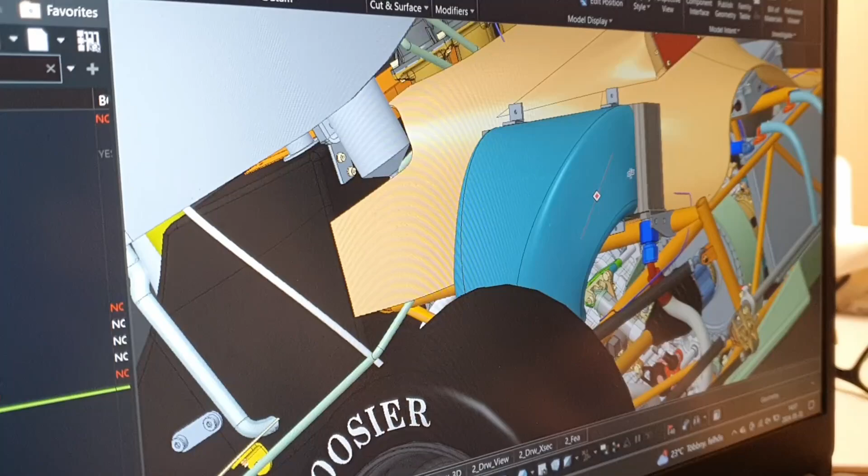So the part we are printing is an air intake vent for a race car being developed by a group of students at the Technical University of Budapest, my alma mater. The 3D printed piece itself is not going to be used directly, but will serve as a mold for carbon fiber lamination. Given the specific strength requirements, they have provided the material for printing.

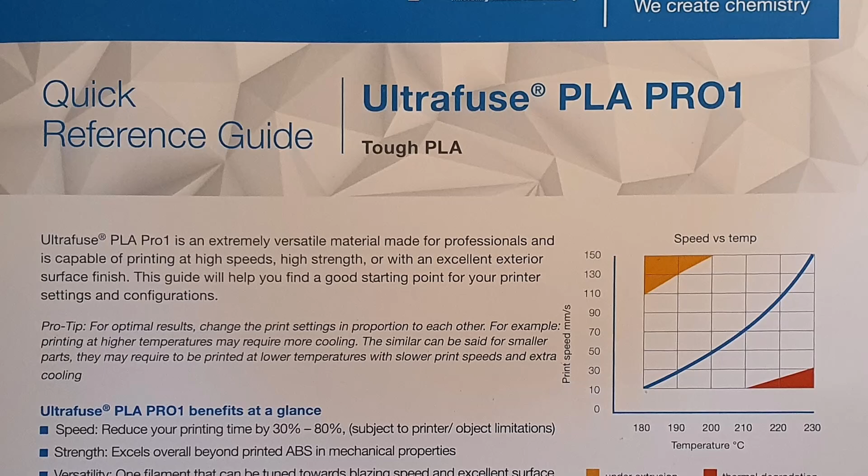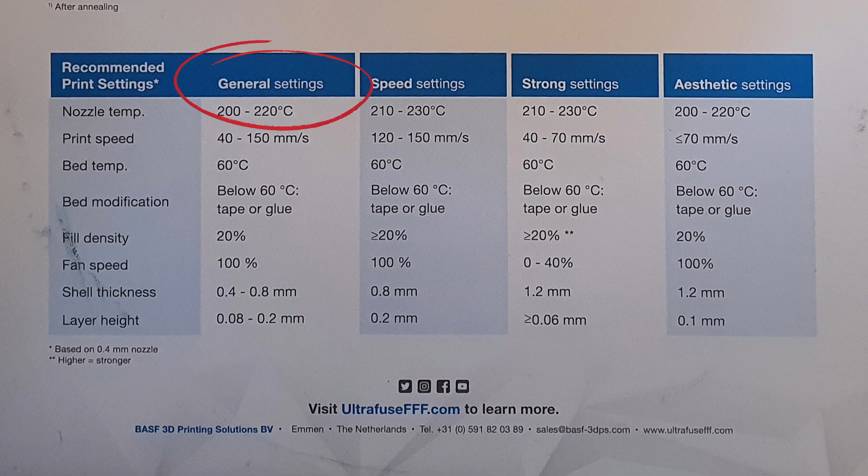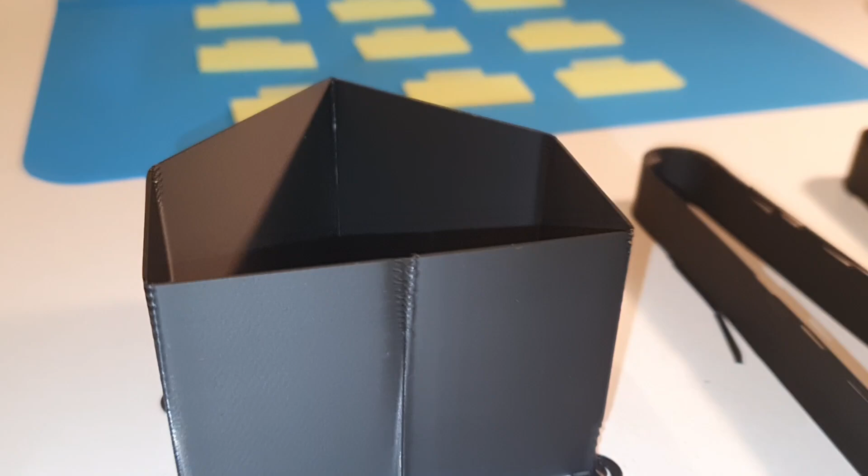The tough UltraFuse PLA Pro 1 filament from BASF. We started by creating a filament preset based on my own take on Sovol's PLA settings, and updated these according to the speed, cooling, and temperature recommendations in the general column on the spec sheet that came with the filament. But then we utilized Orca Slicer's calibration tools to fine-tune these settings on the SV08 to find the optimal temperature, flow rate, pressure advance, and max volumetric flow rate for the best outcome.

All these tools can be found in Orca's calibration menu. If you already know how to use these, you're welcome to skip ahead to the next main chapter, but I might have some extra tips, or you might have alternative suggestions. I encourage you to share them with the community in the comments below.

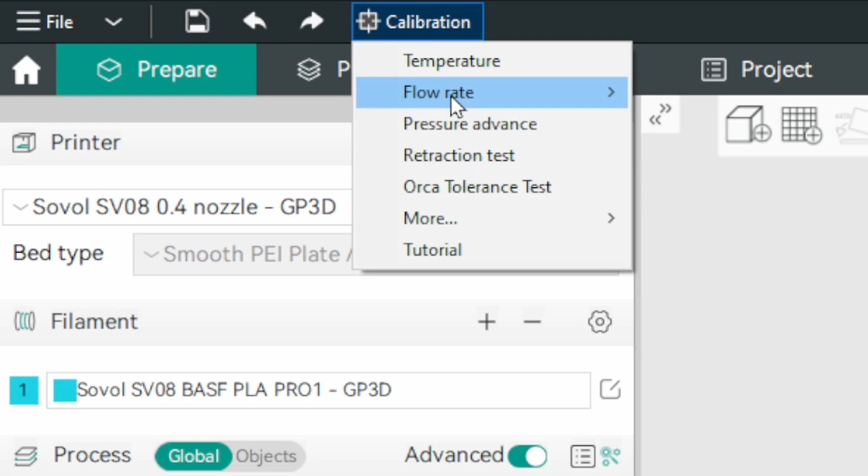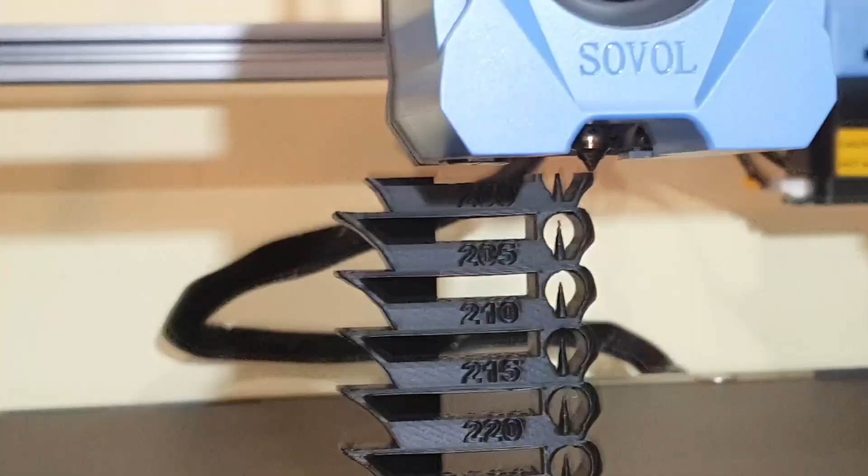We choose the calibration test we want to run, and it's basically best to follow them sequentially. For the temperature tower, we input the range suggested on the box, 200 to 230 Celsius. Then we send the model to the printer. It takes about 30 minutes to print, but you can make it quicker by choosing a shorter temperature range. Each section is printed at a different temperature.

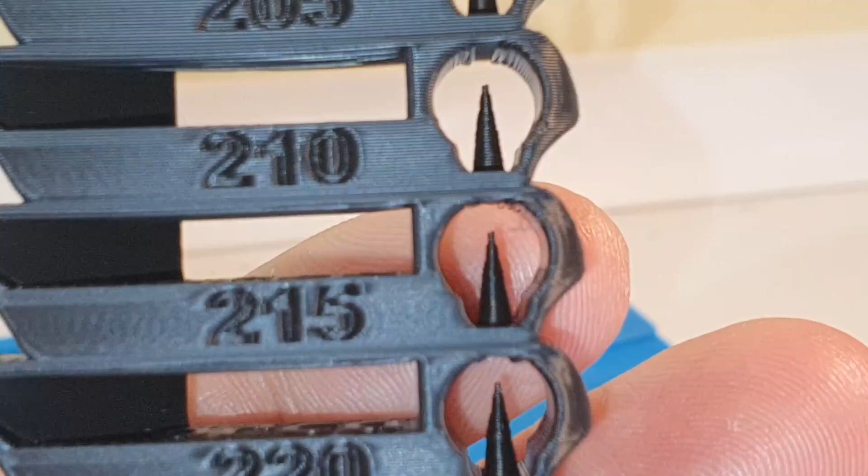This filament is top-notch. It performs well at all tested temperatures. The overhangs look the cleanest at 215 to 220. So for stronger layer adhesion, we pick the higher. Let's enter and use it already for the next test, which will help us tune the flow rate.

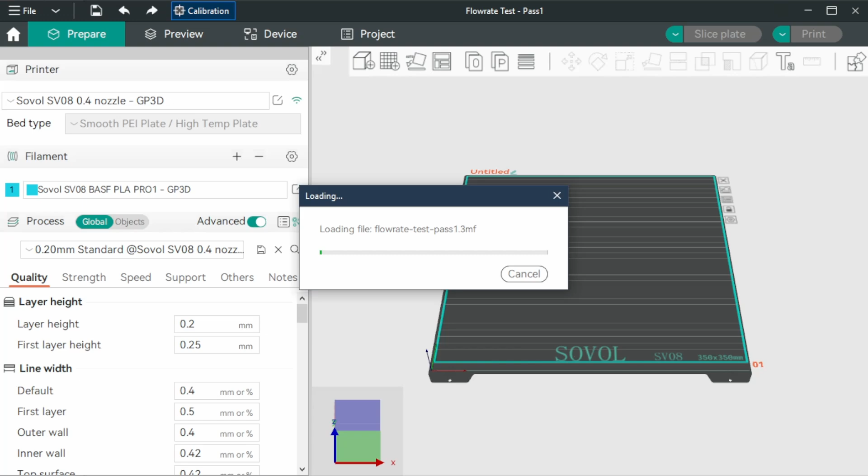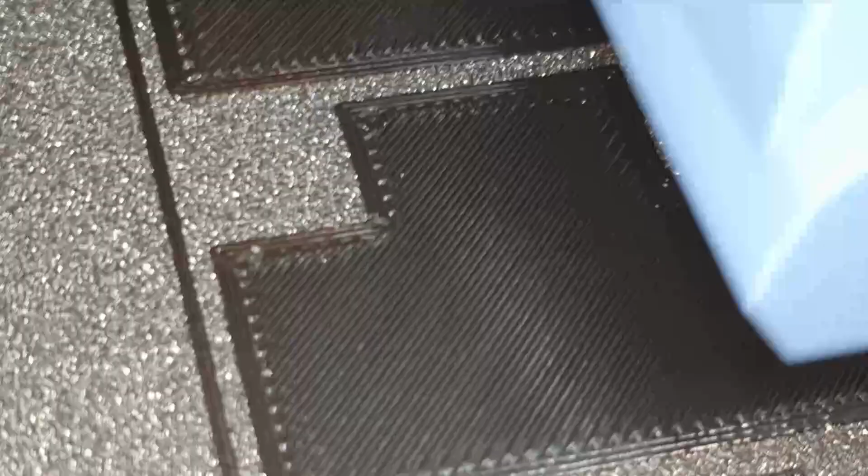Nothing to configure here, it just gives us the model, which we print. Two layers to watch carefully, the first and the last. Of course, you'll need to have your Z offset dialed in perfectly. In the first layer, we are looking for nicely connected lines, no gaps and no overlapping.

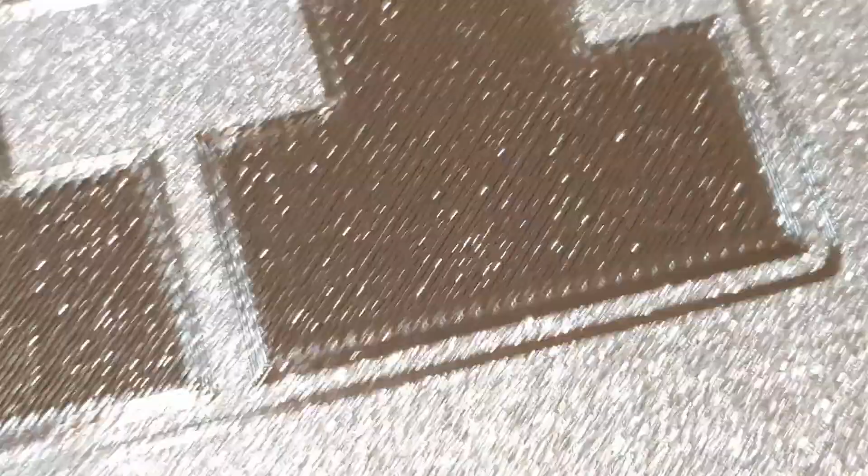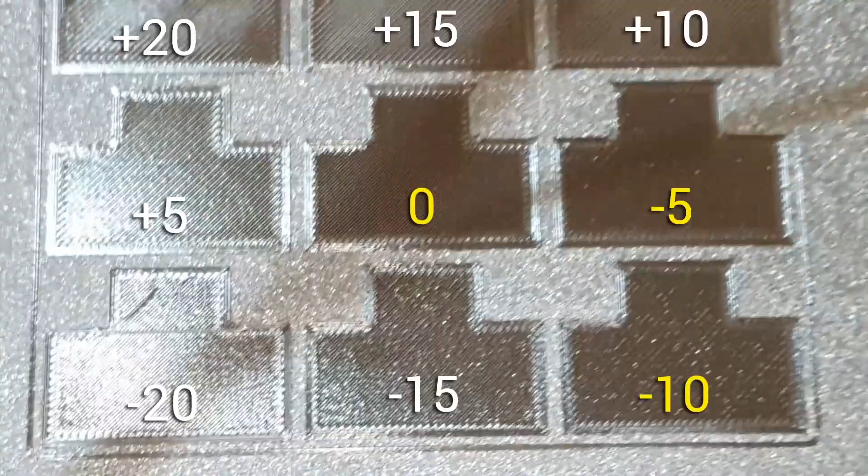Black filament is a bit hard to see, but this one here, you can see it's way under-extruded, and these in the top row are the other extreme. For the first layer, 0, -5, and -10 all look okay to me. Then we should look at the tops, the last layers printed.

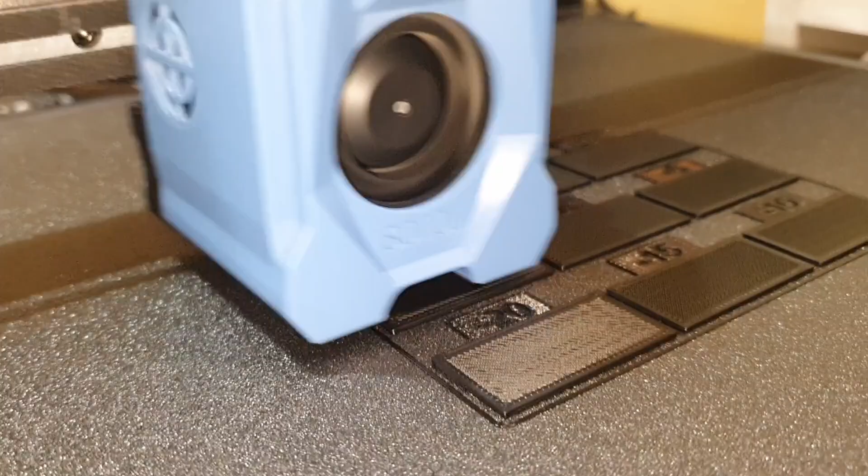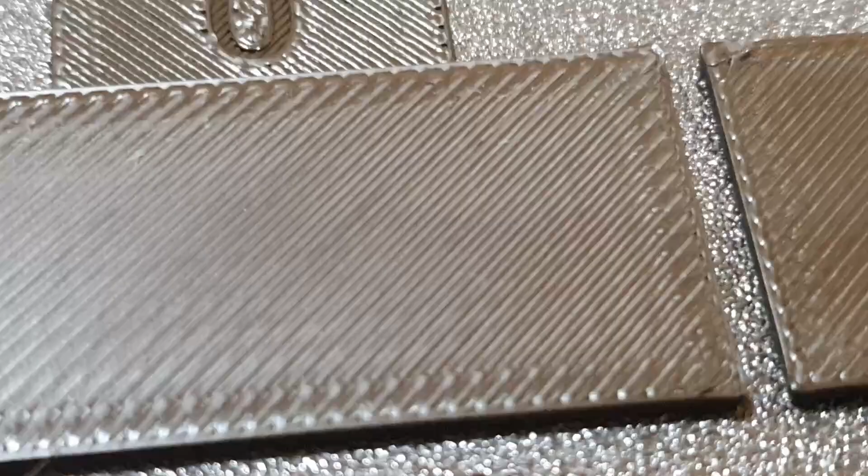Which one of these look the smoothest? Even 0 has some ridges, a sign of slight over-extrusion. I think -5 is the safest pick here. The correct flow rate is probably between -5 and -10%.

We could do a second pass with finer differences between the pieces, but I'll just use this -5, which means we take 5% from the 100%, which corresponds to a factor of 0.95. We multiply the current flow rate of 0.98 by this 0.95. Now, you can't enter the formula here, would be nice if we could. I just use this box to explain how we got to the 0.931, which I leave as a flow rate for this filament.

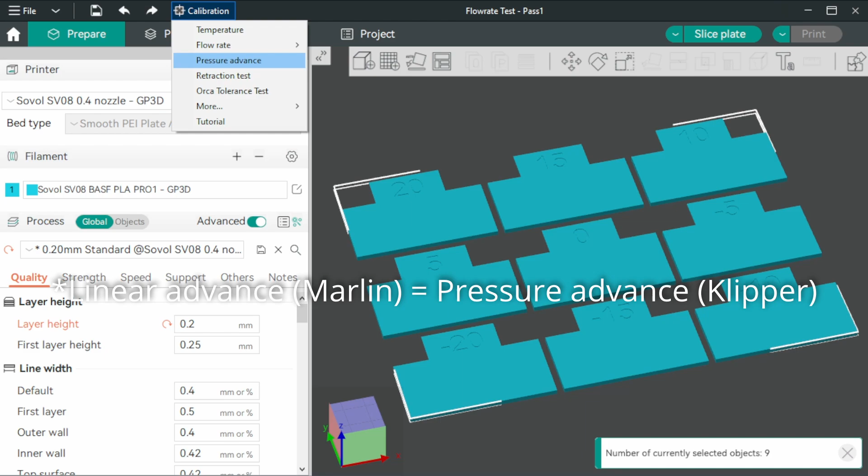We can save and move on to linear advance tuning, which is not really relevant to this model since it affects how sharp corners are printed, and this part has none of those. But let's still do it for your benefit.

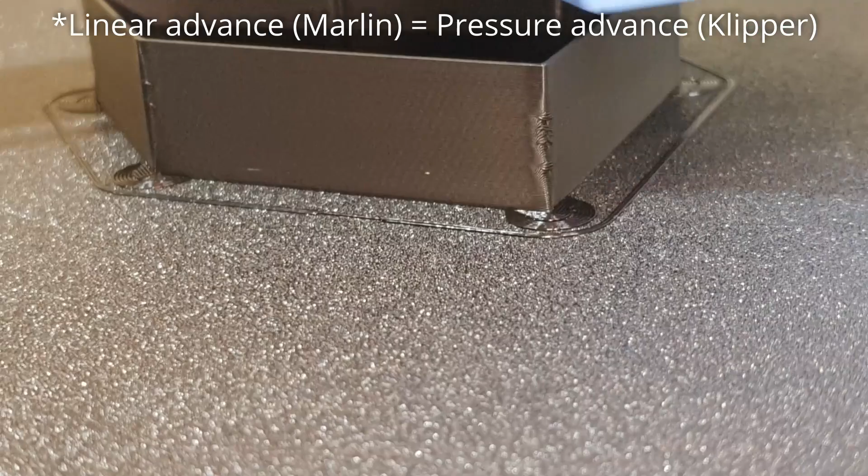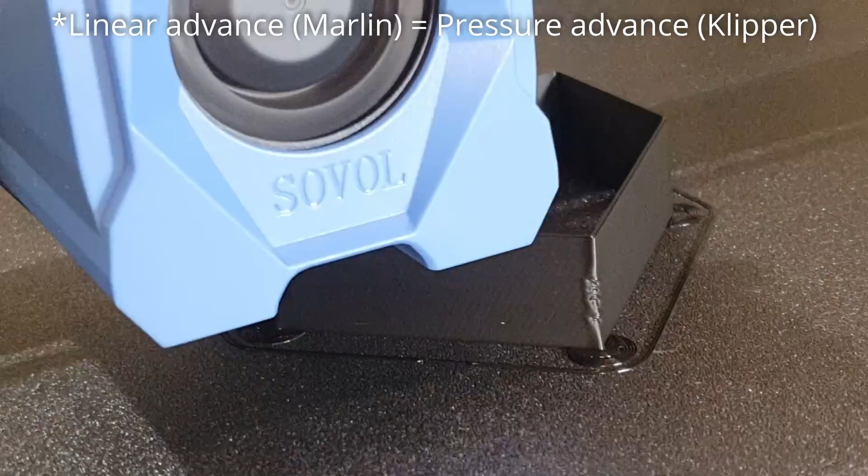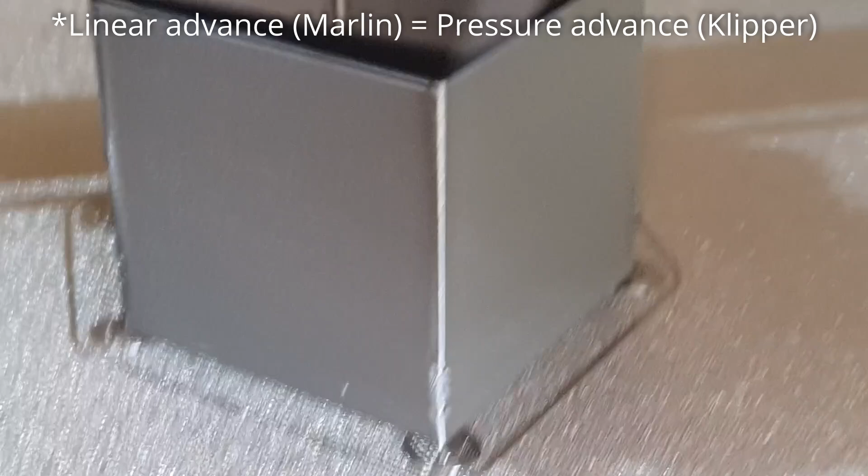This time I keep the default parameters. Linear advance controls the flow rate near the corners. On the bottom of this test object, flow is not reduced near the corners, so we'll see a bit of bulging there, and even the seam line will have little blobs due to too much filament at these critical points. Linear advance is increased as we get higher in the model, to the point where it becomes so prominent that the corners thin out and the seam disconnects.

When analyzing the result, we pick an optimal point where the corners look the sharpest and the seam line in the back is still connected. This point is 25 millimeters away from the bottom for this given filament, so I just multiply the default step of 0.002 by the 25 millimeters and get the pressure advance of 0.0513. Again, don't put the formula there, I just use the box to explain how we got the value.

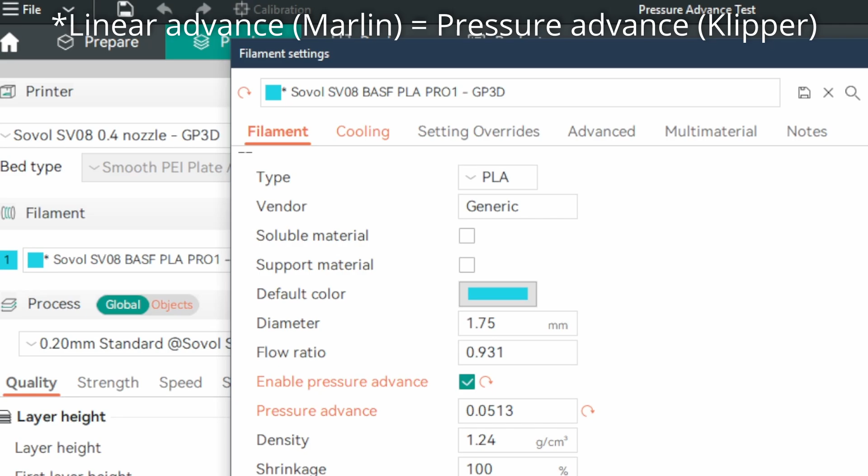Next up is retraction tuning to minimize stringing. It controls how the filament is pulled back or retracted into the nozzle during travel moves. Again, not so important for this particular part, where most of the layers are just one continuous line. There is no jumping around except for the support trees, but there we don't really worry about aesthetics. Let's still do it for the educational value.

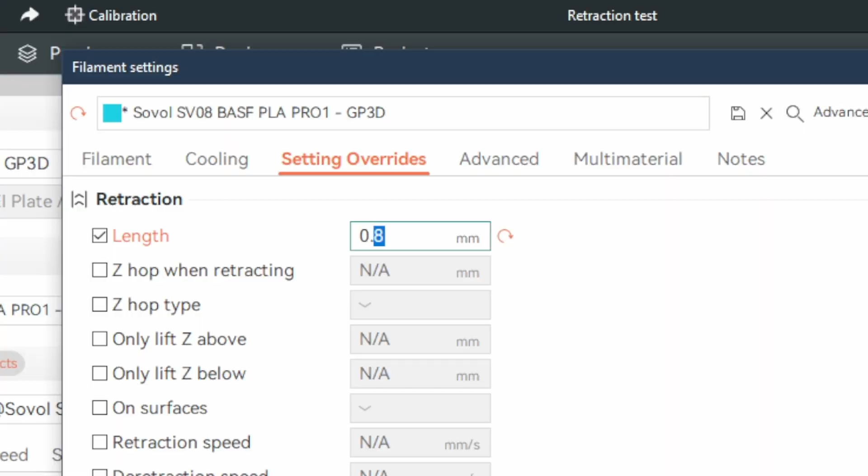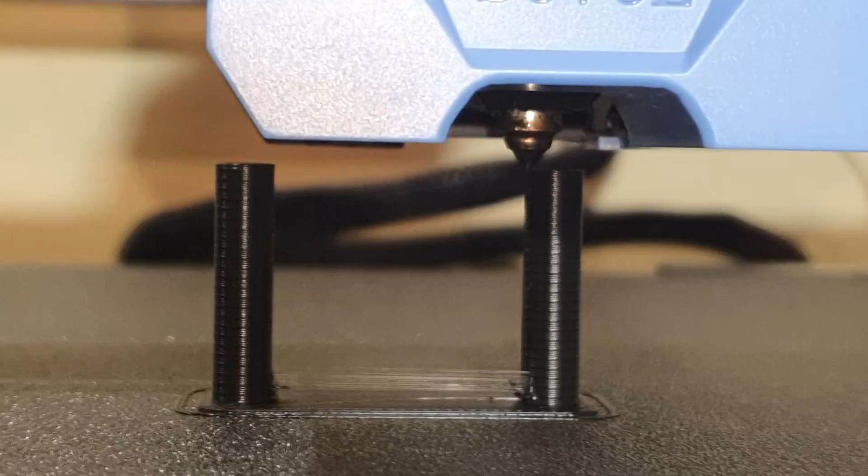The default retraction distance of the SV08 is 0.8 millimeters. So let's set the test to run from 0 to 1.5, about double the default value. We are looking for stringing. Again, this filament and the SV08's stock extruder are both so good that we see almost no stringing, except at the very bottom of the columns.

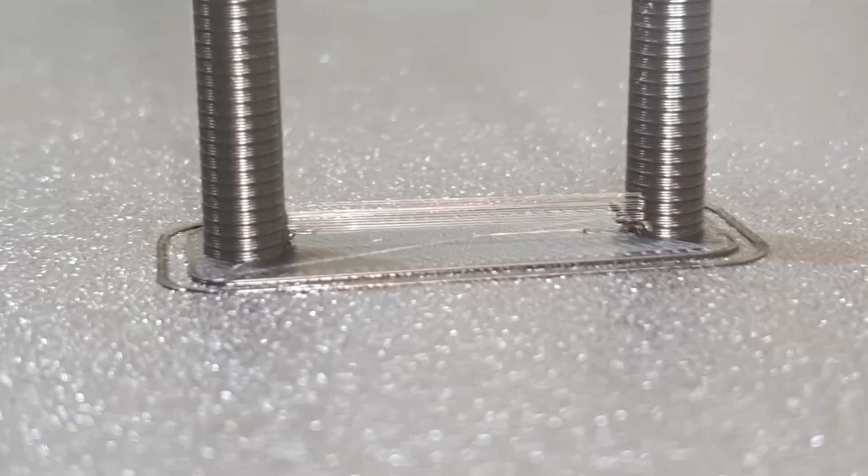The notches are for each step of 0.05 millimeter increase in retraction distance, as we have set it. We can see no stringing above the third notch, which theoretically corresponds to a retraction distance of 0.15 millimeters, which would suffice for this filament, but I will just leave it at its default for this project.

The last calibration test we will do is for maximum volumetric speed - how much filament the nozzle can push out per second. This is most important for fast printing of large objects, where the motion system could be moving the hot end faster than it can get filament out.

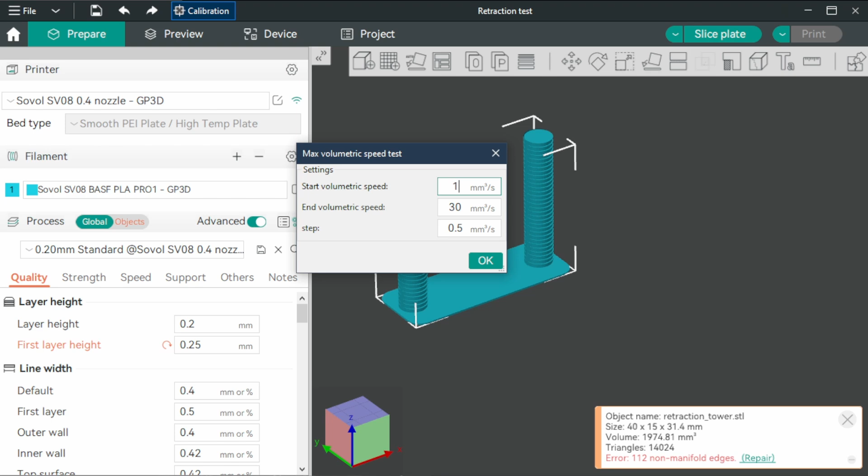This is a large model, but we are not going to print it at the highest possible speed to achieve stronger layer adhesion. So flow rate will not really be a limiting factor here, but I'm still curious what this filament is capable of. Being PLA, I'm sure it will be fine at 10 millimeter cube per second, and just out of curiosity, we can aim at 40.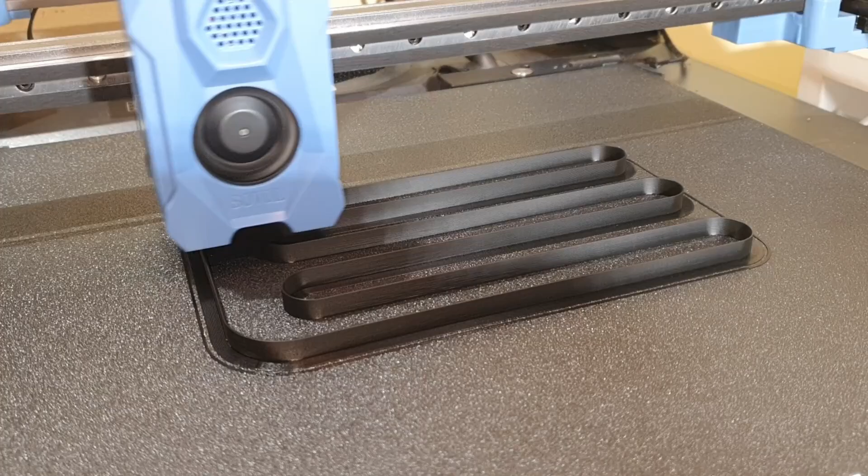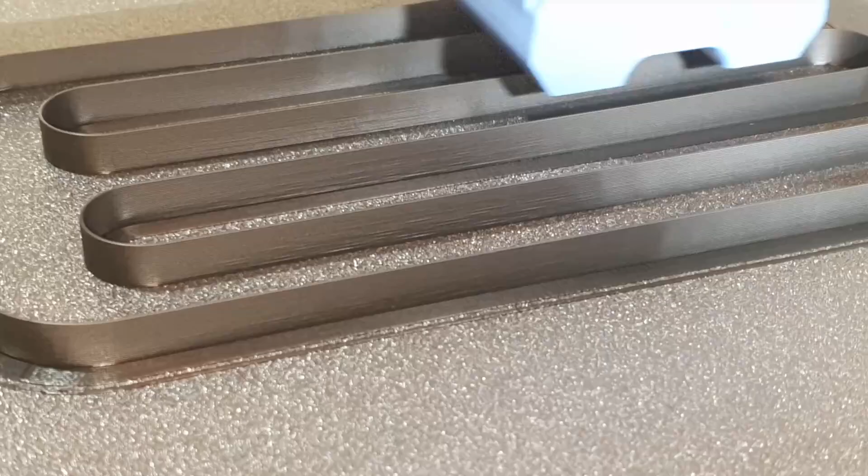We'll stop printing the test object where it fails anyway. And to speed things up, I'll set the step to 1. This test object has long, straight lines where the tool head can reach the speeds that really test the flow rate. It goes faster and faster the higher we get, and we are looking for the last good layer.

We could inspect and measure after printing with a vernier caliper, but if you're using my macro pack, I've added a current Z option in the tune menu, which is available during printing.

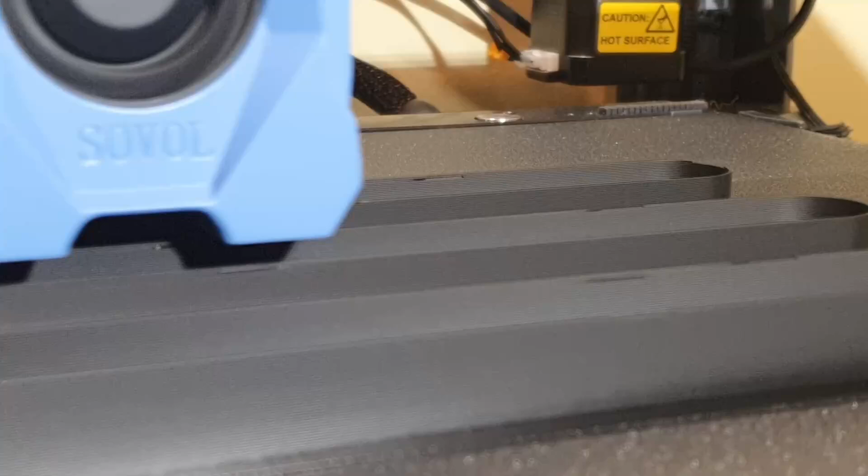According to this, we can see the first gaps in the lines at 12.9 millimeters. So a safe value would be at 11 millimeters. Since the test started at 10 millimeters cubed per second, we can enter the value of 21 in our filament settings. Equipped with the fine-tuned filament preset, we were ready to slice.

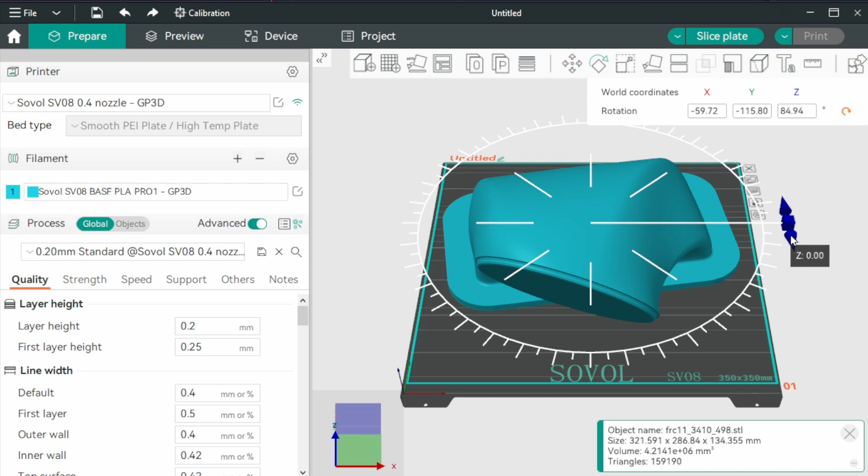As you can see, the part barely fits the build area of the SV08. In earlier prints, I had slight first layer issues on the left and right edges of the print bed. Given the option, we oriented the part as much away from these edges as possible.

I'm not sure why, but they've asked for extreme strength for the whole object. So we followed their request of 3 mm wall thickness. Ideally, this would be a job for a 0.6 or even a 0.8 mm nozzle, but I haven't yet received the large nozzle kit from Sovol.

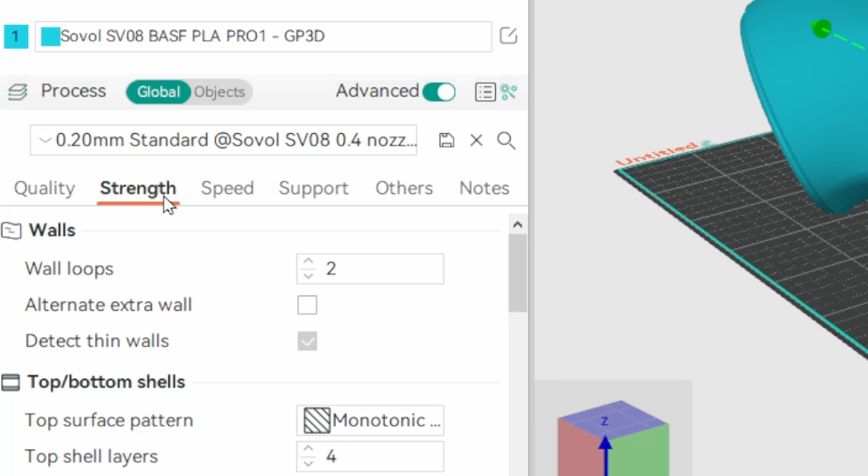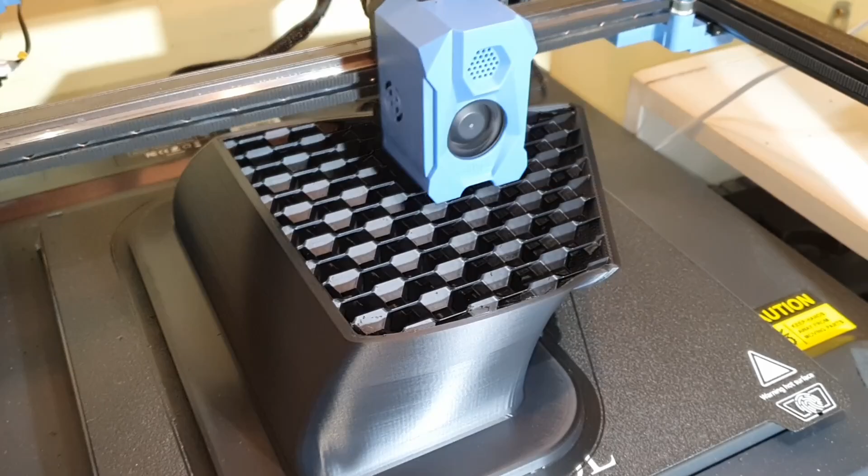So we set the stock 0.4 mm nozzle to print 8 perimeter loops and 12 top-bottom layers at 0.25 layer height, but kept the infill density fairly low for most of the model. They specifically requested this bottom plate area to have 100% material density, which we were able to set using a modifier cube.

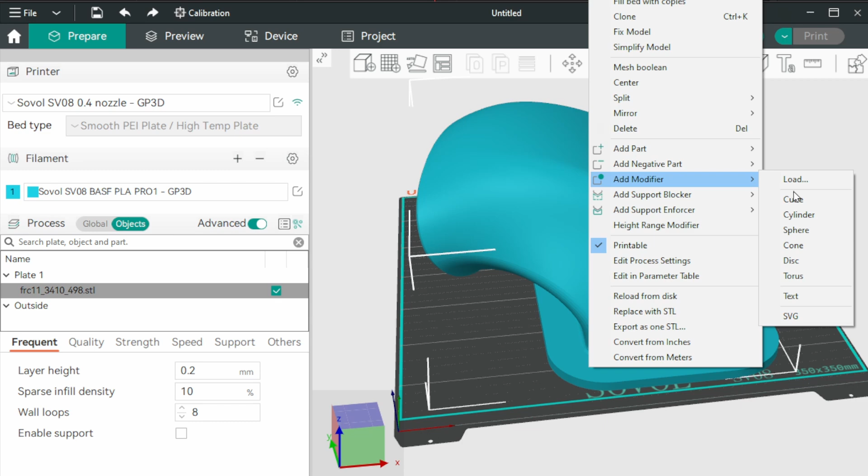I right-click on the object and select Add Modifier Cube. Then resize and overlap this yellow cube with the base of the object. Now we can switch to per object settings in the process section and make adjustments in the settings for the overlapping parts. We just set infill to 100%.

With such a large and dense bottom layer, I was concerned about warping. This thing will pull on the bed like crazy. As you will see, this concern of mine was not baseless.

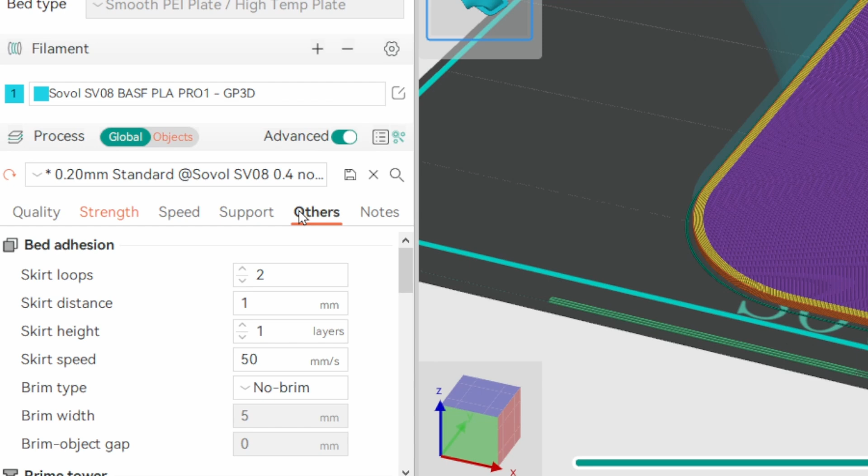The corners of the bottom are all rounded, which helps to avoid curling up, but we have also added as much brim as could fit on the build plate. Still, this curved section here on the left will need supports.

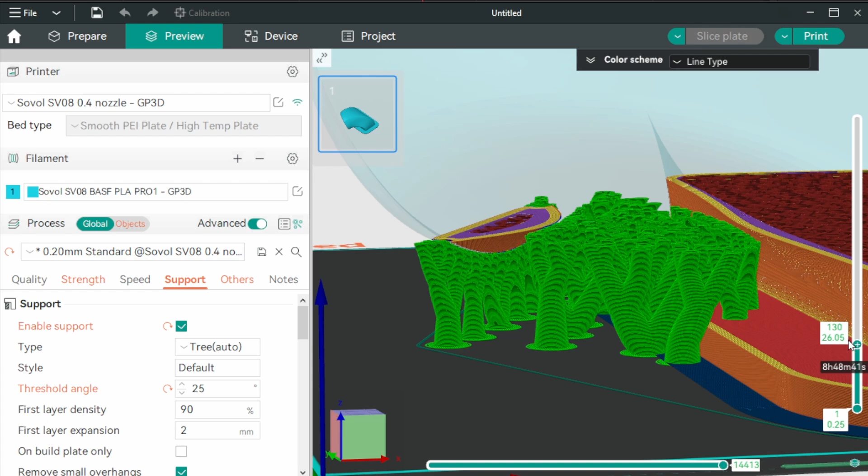We enabled supports and set the threshold to 25 degrees until we saw the optimal amount of supports. Notice in the preview, the global brim setting did not affect the trunks. And without giving anything away, let's just say we'll circle back to this, and not even just figuratively.

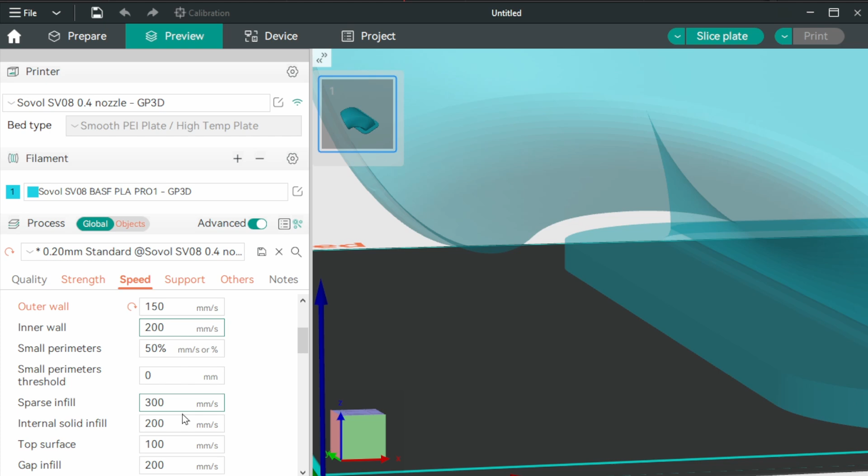Mark my words. Following the recommendations for the filament, we slowed down the wall and infill printing speeds, and with everything prepared as best as we could, we sent the print job to the printer.

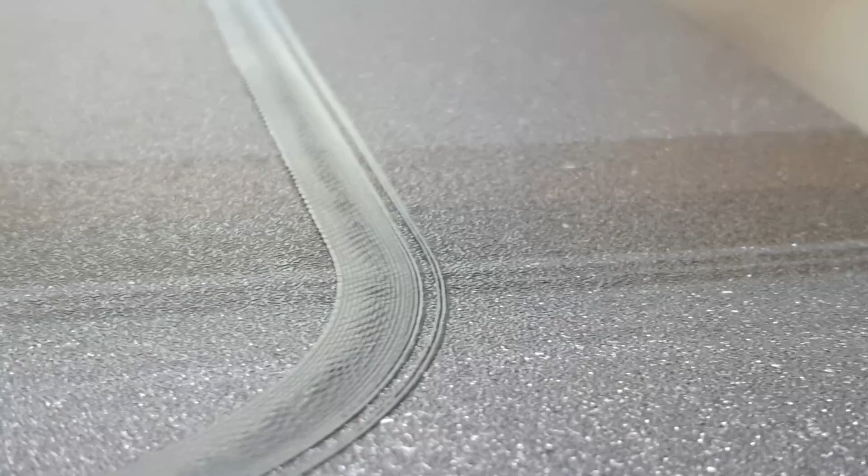First layer printed okay, though it needed a little bit of Z height adjustment. Halfway through printing the first layer, I heard a cracking noise, and the first layer lines on the right side started to look too squished. The bed must have warped up just a tiny bit because of heat expansion and the pulling force of the first layer.

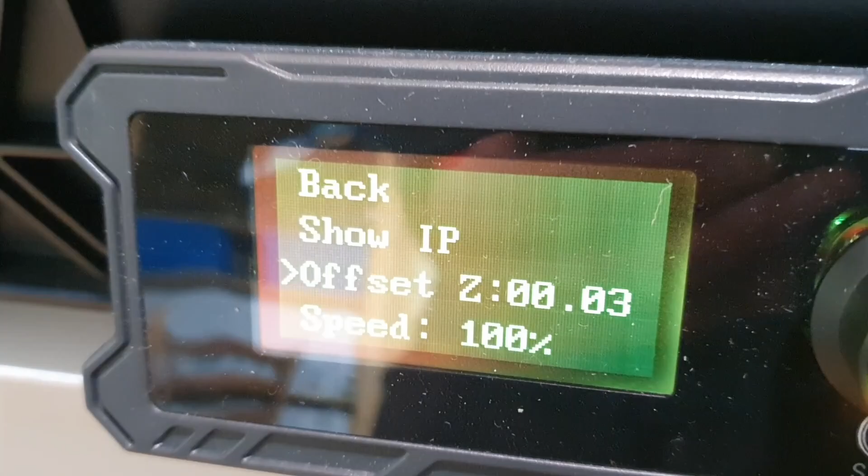I just raised the nozzle by a few hundredths of a millimeter to allow more space from the bed's surface. It wasn't a good idea, though not apparent immediately.

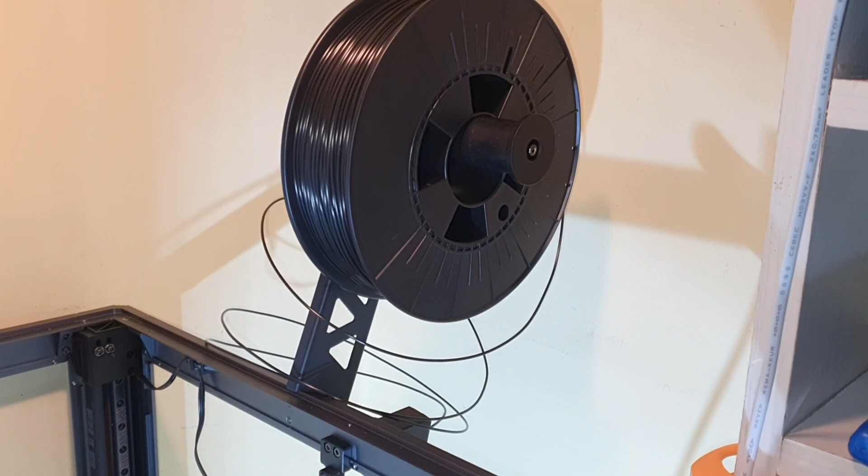Another annoyance was with the filament holder. The design aimed at reducing friction with bearings indeed facilitates the feeding of sensitive flexible filaments. However, the narrower 750 gram plastic BASF spools tended to unravel, particularly when full. I resorted to an empty toilet paper roll and a Sharpie as a makeshift solution, though this issue needs to be addressed later, maybe by adding some kind of a variable friction clutch control somehow.

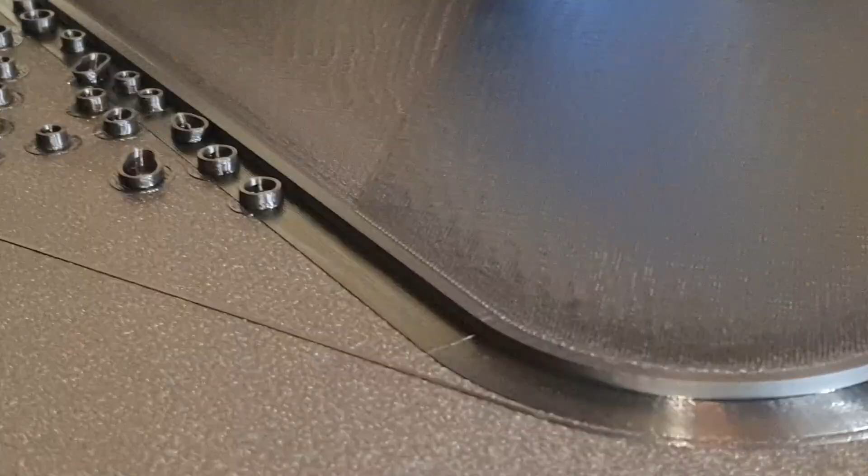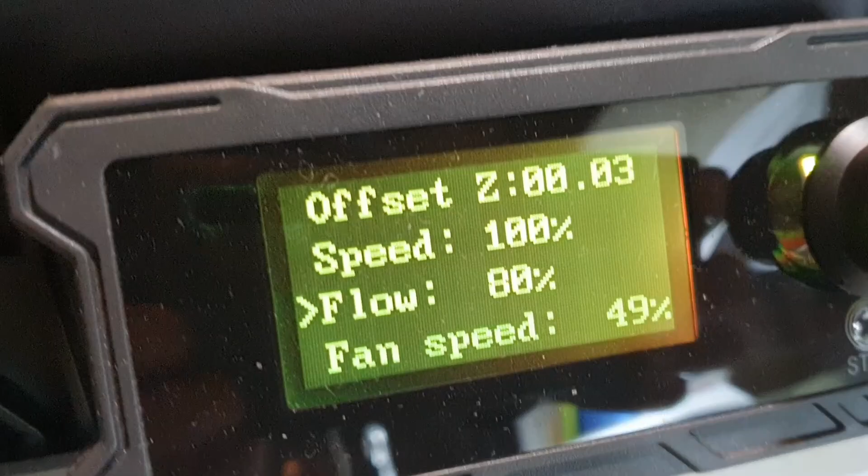Subsequent layers printed beautifully, though at 100% infill, the filament has nowhere to expand. Even though we did flow tuning earlier, I had to further reduce the flow rate on the fly to stop the nozzle scraping the previous layers printed. This fixed the scraping, but it took a long time.

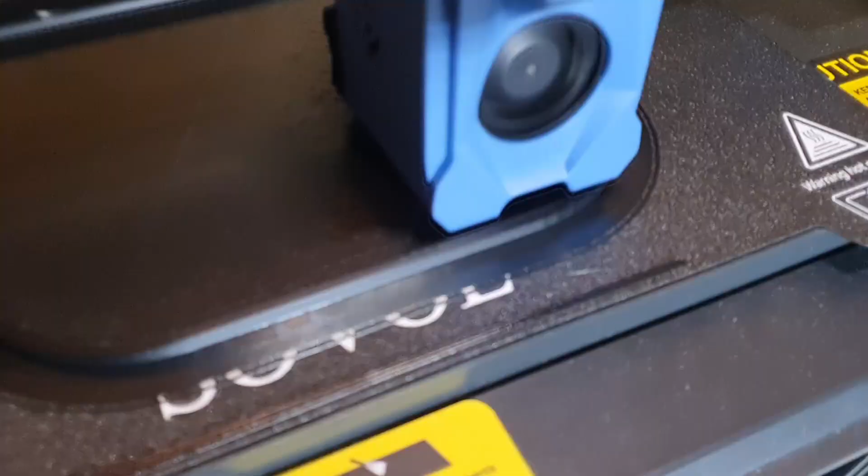5 hours into the print, and we were still printing this solid base, still under 10 millimeters, though it all seemed to go according to plan. And then the problems started.

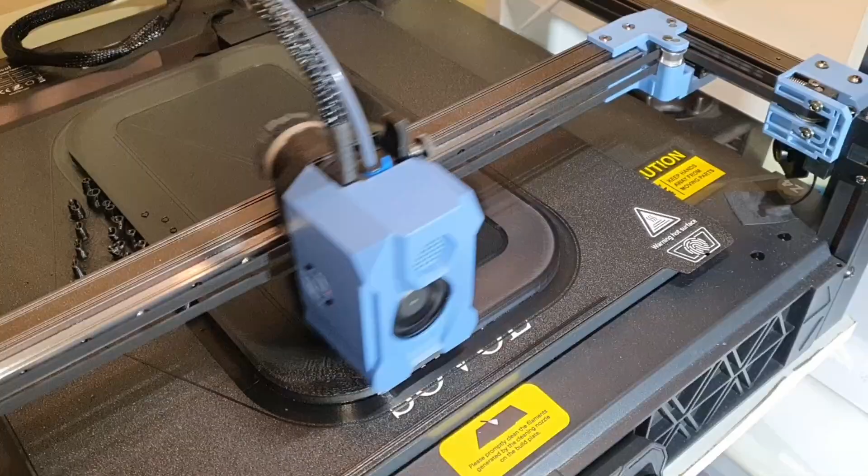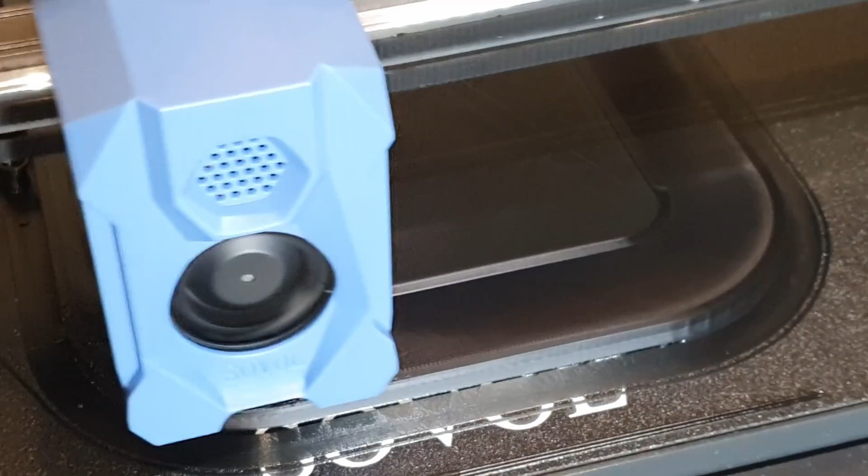I couldn't check on the print in the next 2-3 hours, and by the time I looked at it again, the front left corner started to lift. Remember how I increased the Z height by a tiny bit to balance out the warping of the bed while printing the first layer? Although it fixed the side where the bed slightly lifted, it of course caused a bed adhesion issue on the other left front side of the bed.

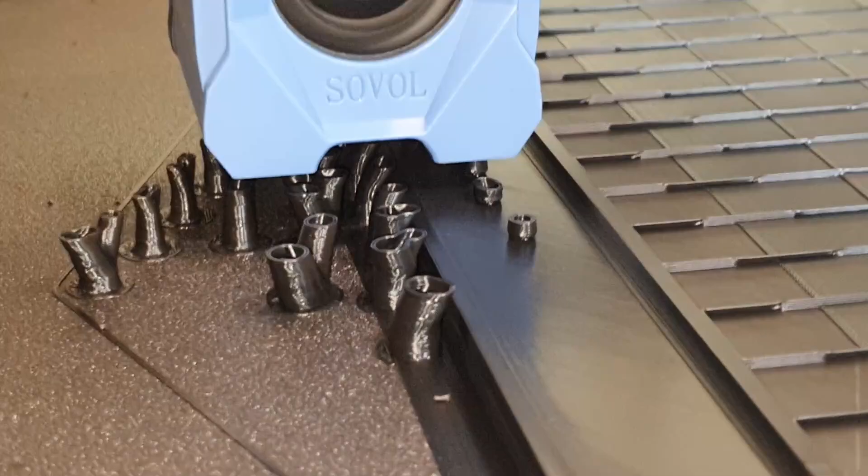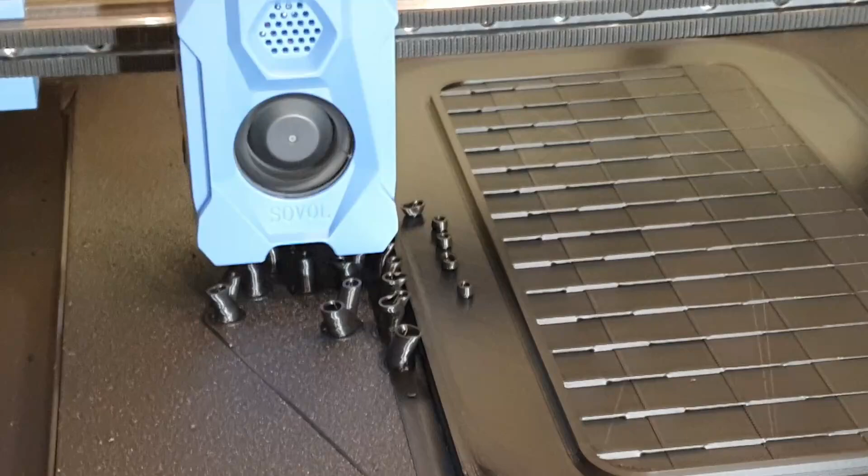Close to 8 hours into the 18-hour print, we decided not to cancel, since the warping did not affect the main part of the object, only the base that is going to be clamped down. So we let it continue, hoping the rest of the base will hold it to the print bed well enough.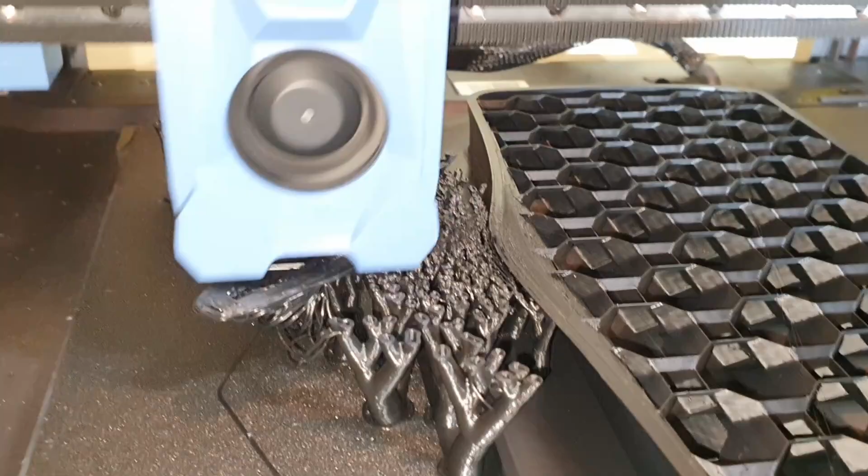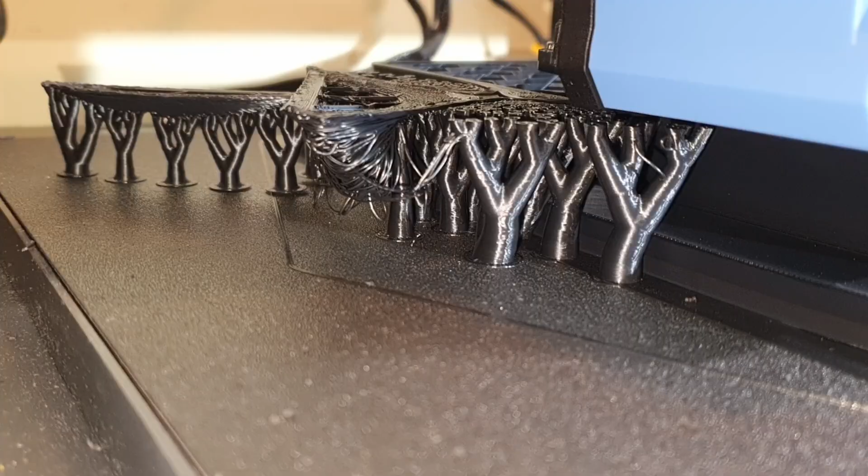It did, except 10 hours into the job, another catastrophic incident happened. A row of supports became loose and got totally displaced. This was unrecoverable. Although we set a fairly large brim for the whole project, turns out that setting doesn't affect supports. For supports, we need to configure brims separately, and it's not even called brims there. I'll show you in a minute because we had to cancel at this point.

We wasted some time and a lot of filament, but gained much experience, and we still had enough filament, though a different color, for a second take.

So here are the settings we changed for round 2. First of all, we increased the brims around the base of the tree supports using the setting first layer expansion. Yes, that's how it's called. That was a costly oversight in the first take.

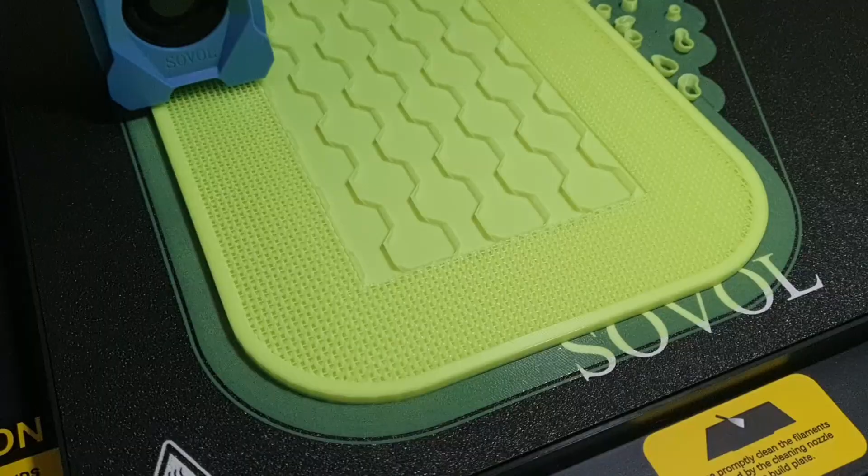Second, we reduced the infill density of the base from the unrealistic 100% to just 25%, which is still significant, and at the same time increased the number of wall perimeters in this part of the model to a whopping 12 to keep the strength.

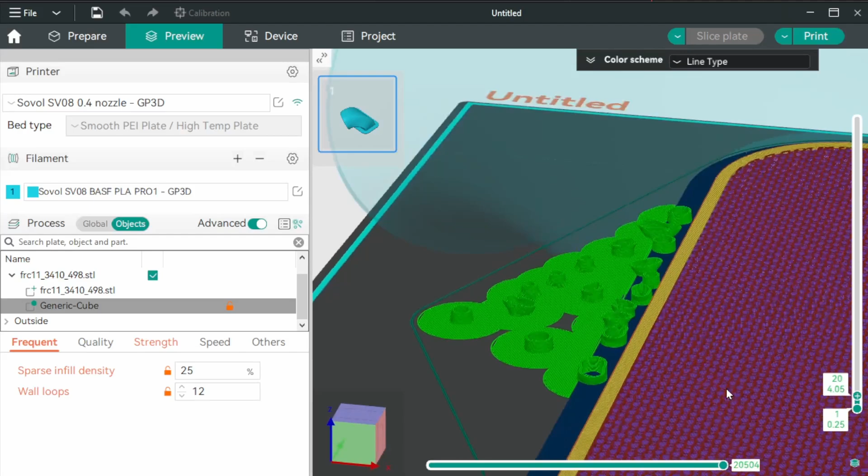We also increased the Z-hop distance slightly from 0.2 to 0.25, just to make sure the nozzle wouldn't touch the printed surface in travel moves.

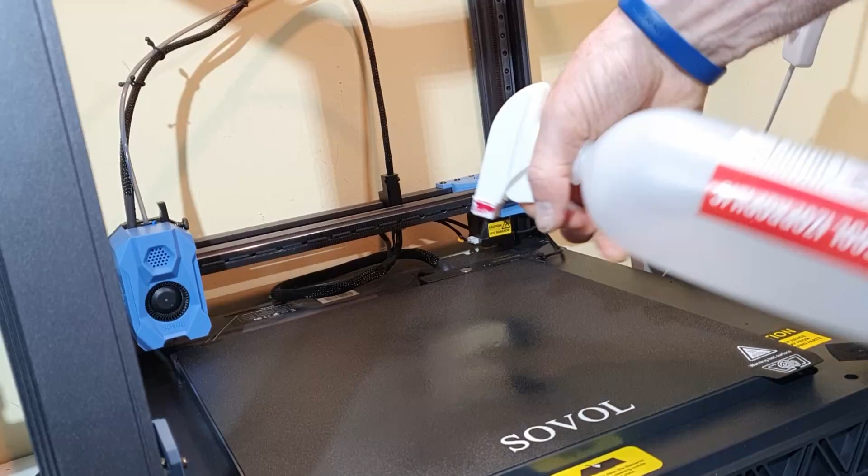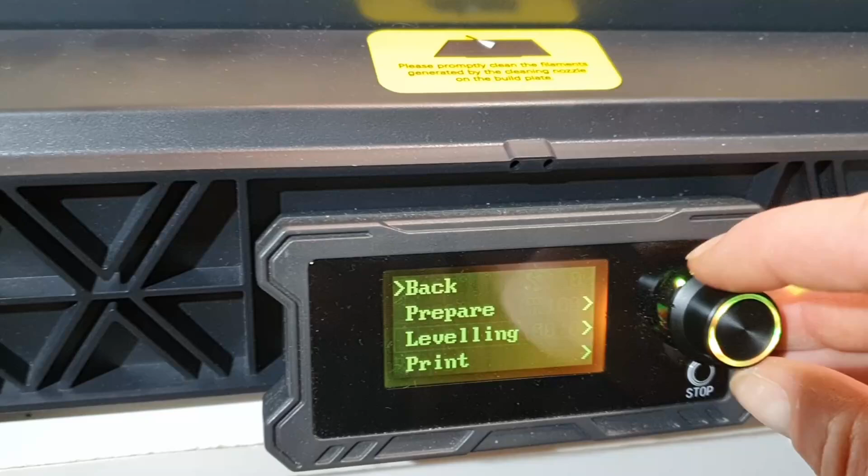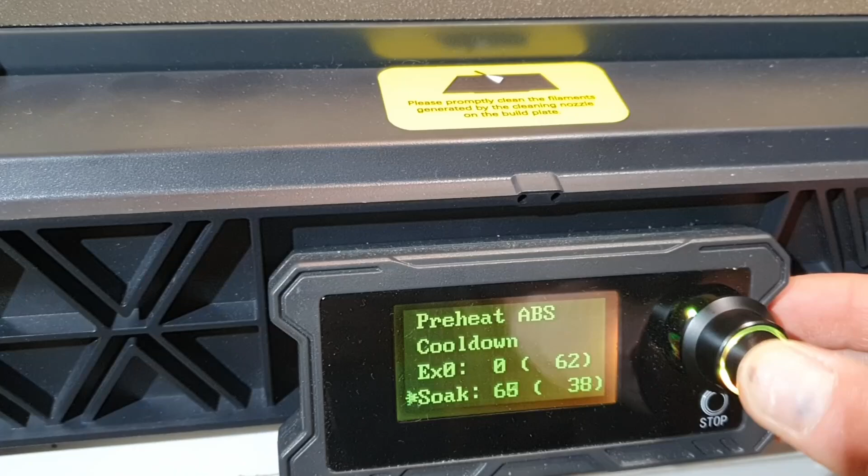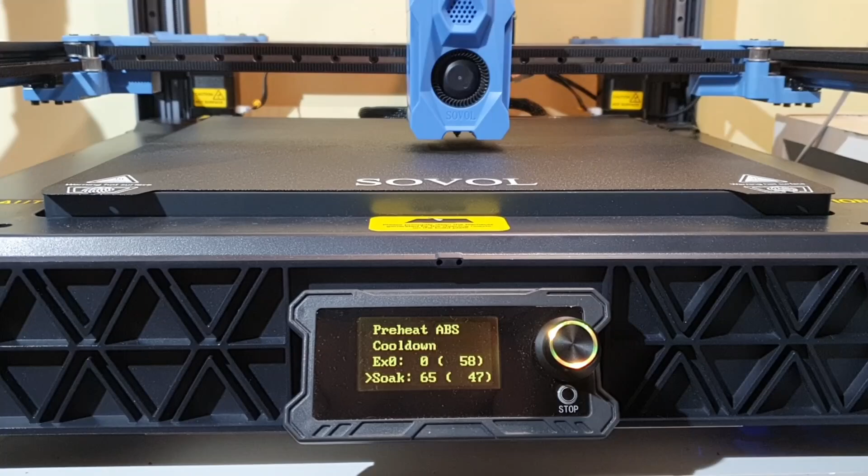Not a setting, but I re-cleaned the PEI surface, wiping it multiple times with isopropyl alcohol. And most importantly, I let the bed heat soak even longer, a full 15 minutes before starting the print with the adaptive mesh scan. This heat soaking macro is also part of the little collection I made available on Cults3D. It will heat the bed to a selected temperature and move the inductive probe close to the bed so it too gets acclimated.

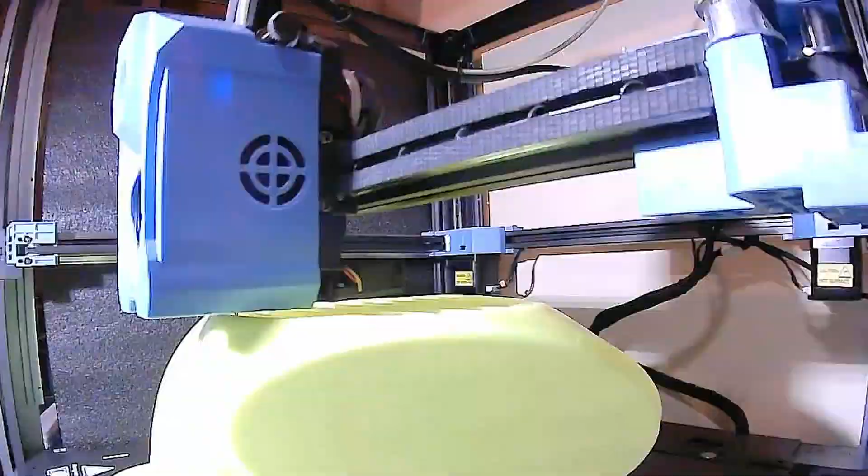These small changes eventually brought success. After another full day of printing, no intervention was necessary. The print completed without a hitch. Perfect success. The part is now ready for the carbon fiber lamination process and will be part of the race car that is going to be rolled out in a week or 2.

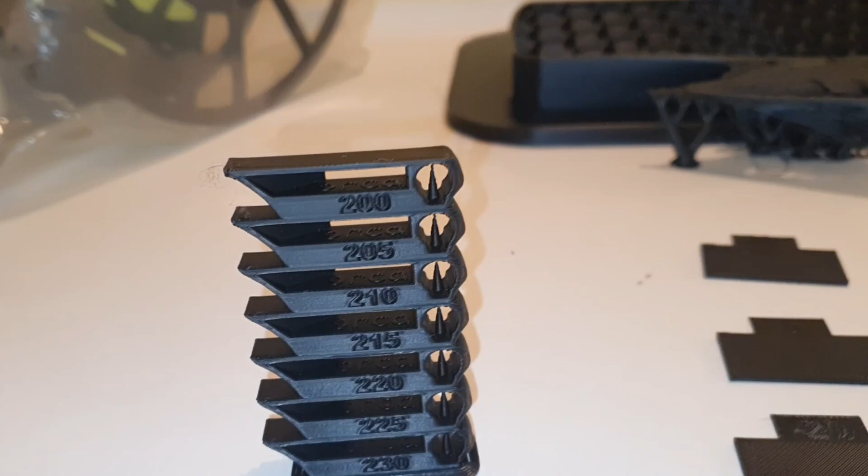I've shown you the whole process now, with its ups and downs to help you with big print jobs. That's where the Sovol SV08 really shines, in my opinion. Whether it's parts for a race car or a big statue or helmet, I hope these tips on filament tuning and settings will help you succeed with your Sovol SV08 or any 3D printer you use.